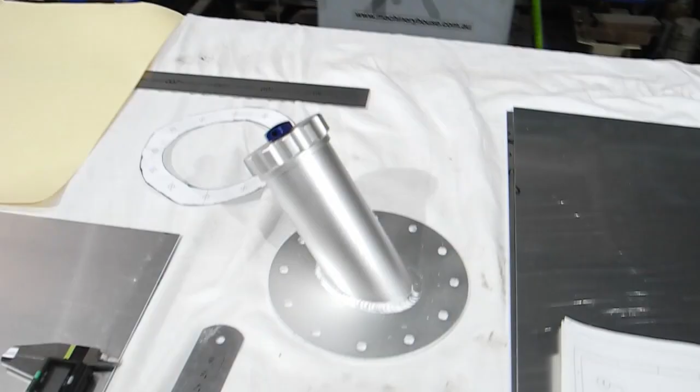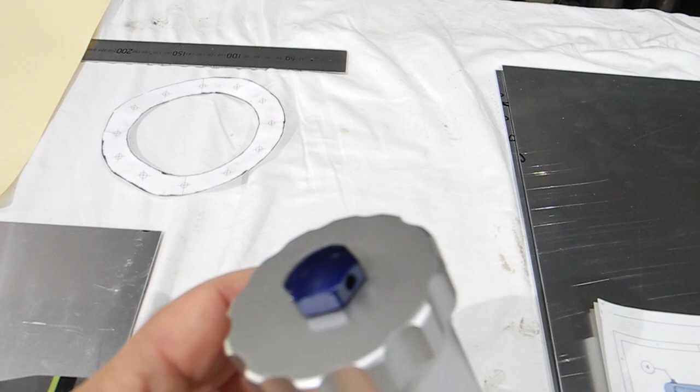Okay, so here we go. Just making some adjustments to the camera, so that we're not reflecting too much light. This is the filler cap that we've bought. That's the little rollover valve to allow the air in. This is actually very much the same as the standard Healeys, except I've gone for a full screw cap and included the rollover valve into the top. And this will also allow me to get access to the tank should I need it at any time.

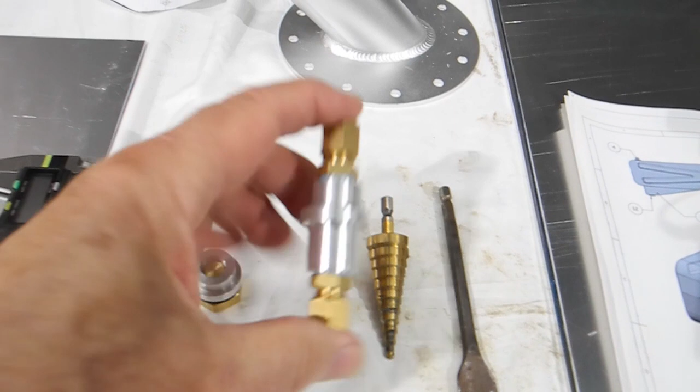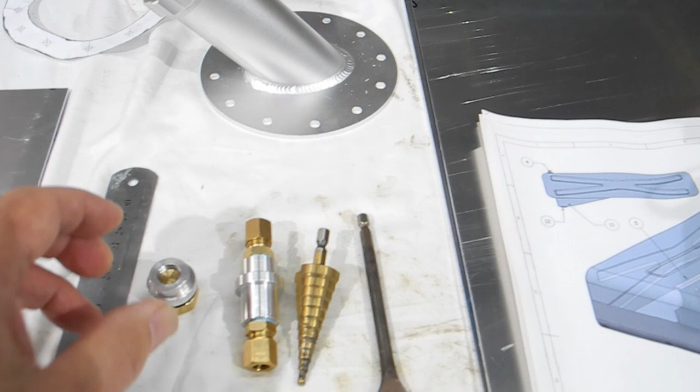Here I've machined a couple of parts already, that's the inlet outlet to the fuel pump, and then to the bottom of the tank, with copper tube there. And this is my drain valve, and I've already made a cap for that as well in brass. Okay, so coming to the drawing, this is my complete assembly drawing. I hope that focuses alright. That's probably a bit better.

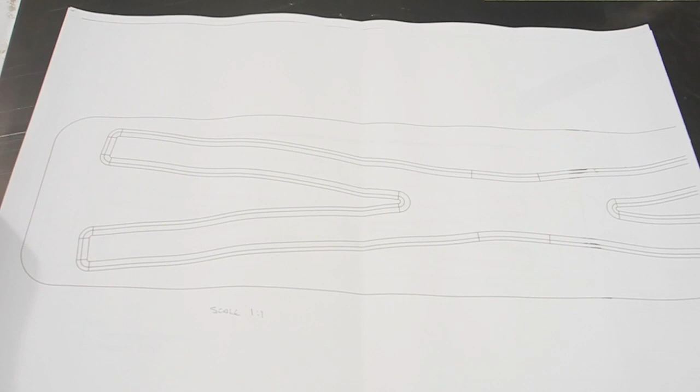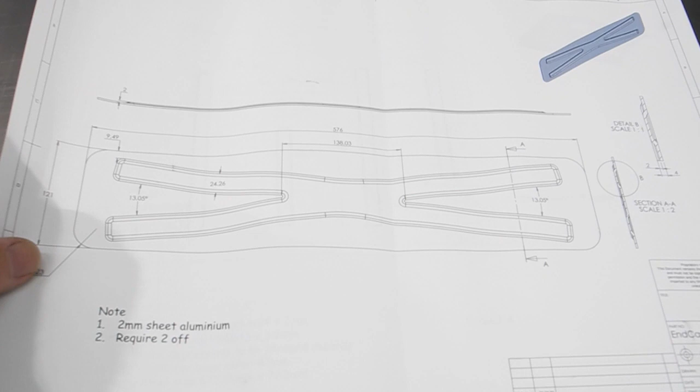Okay, so there's my fuel tank, pretty much almost exactly the same size as the original. This here again is to give me 1-to-1 on the end panels, so that I can just trace that directly onto the end panels for bead rolling. This is again the end panels of the fuel tank. Right, this is the top of the fuel tank. There's the fuel filler, and this here will be where the sender is, and this is this valve here.

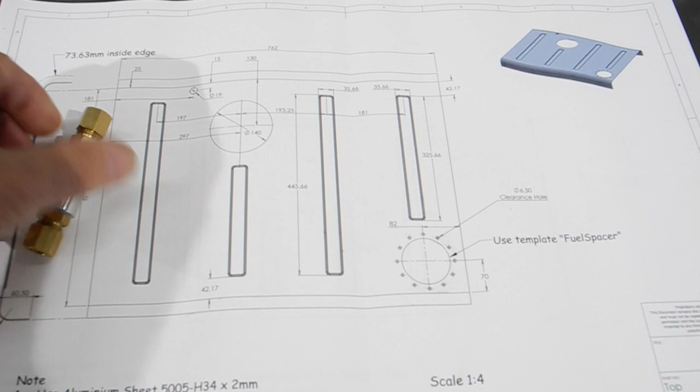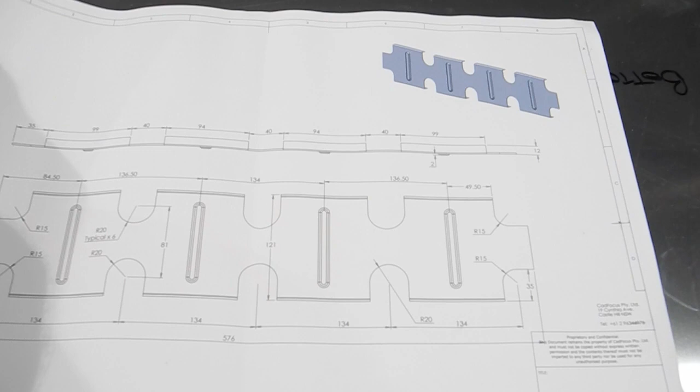The next thing is this is the bottom. Okay, so the sump. And again bead rolling, mainly for the bead rolling sizes. The baffles will look somewhat like this. And that's it for the A3 size drawings. And there's my fuel sump. This part here I've actually already made, and I've got the connections in brass already for that. This here is my drain plug.

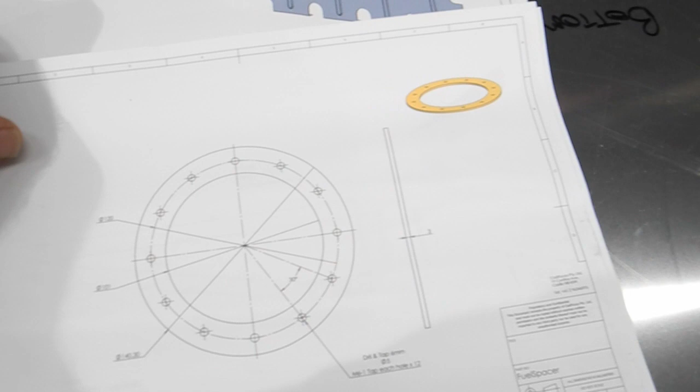Okay, this is the sender. That's a 1-for-1 ratio. I'm doing that in aluminium to weld to the top of the fuel tank, and also another one in brass for the screws to take hold of. Again, 1-to-1 scale ratio. This is the fuel filler. Again, the same thing. I've got to make one out of brass. The brass is coming. 3mm brass to hold all these screws while I lift it up through the tank and through the filler, so I can do up all the nuts.

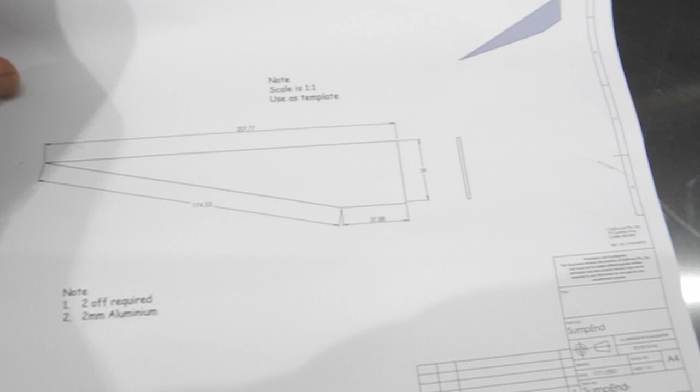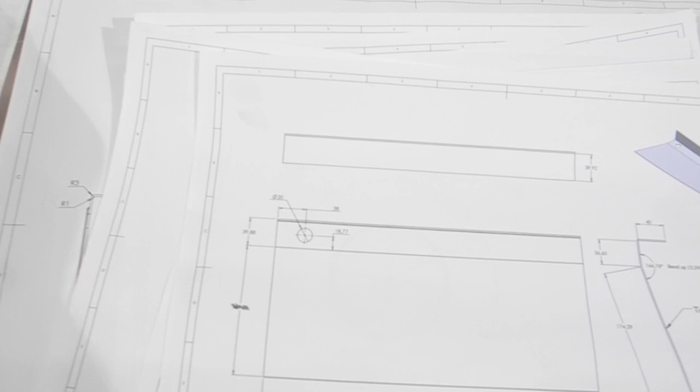This is the end of the sump. Again, just 2 drawings of that, and this is where the sender is, and that sits down into the fuel tank itself. So just a profile of that. So what needs doing is that I actually need to cut all these out, and I've already started with this. I've got the bottom and the top. This is my fuel sump here, and they're my bend marks for it, and that's where the hole is for the fuel drain. So it's just a matter of progressing on and cutting out, which is actually quite boring, I suppose, but the point is that it helps.

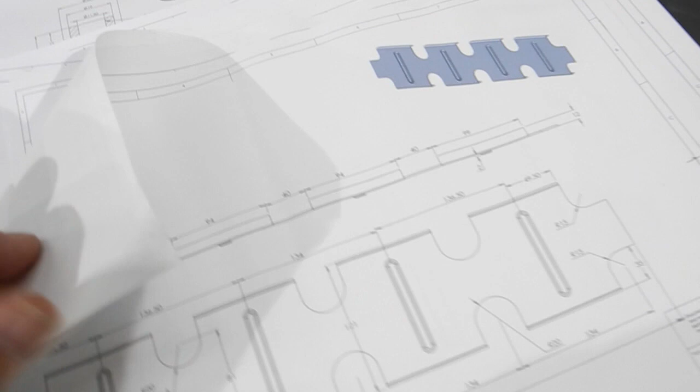The reason I CADed the whole thing up is because it shows me the exact measurements that I will need. Otherwise, you know, to stay precisely to the schematic of the whole drawing. Where is it? Alright, this is the assembly drawing. So the idea is to remain right on spec on that, in the sizing that I've got.

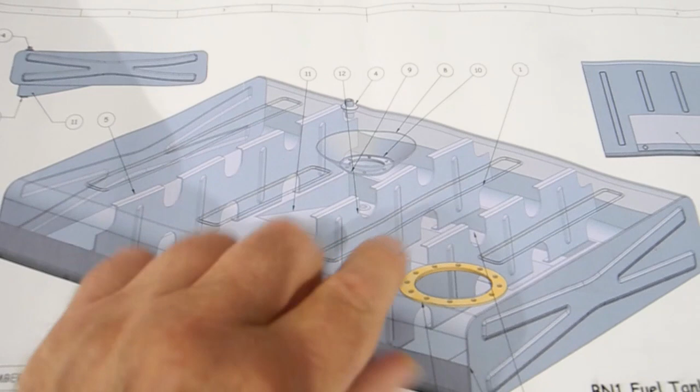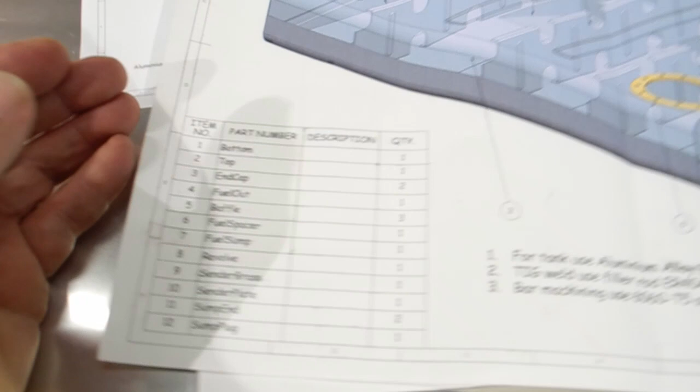Alright. So side view, top view, which you can see through, that's the brass plate, and there's another brass plate here, and then that's the bottom view there. Again, all the strengthener ribs, which I've got to mark out next, once I've cut out all the basic shape from that sheet there. According to this, about 12 parts actually make it, but there's 3 baffles and so on. So this is all my parts, item number. This is the type of aluminium I'm using, which is 5005. The hardness is 34 in 2mm.

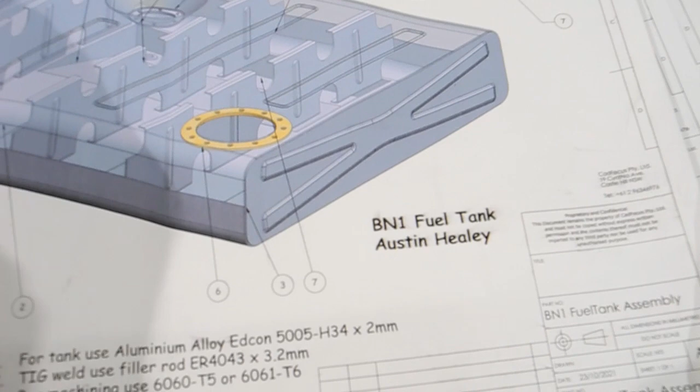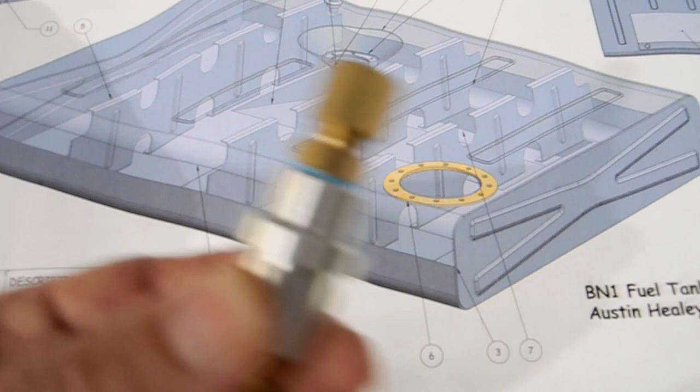I'm using welding rod ER4043 because it's a good flow rod, and the bar, the machining that's already done, I did with 6060 T5 hardness, and that came out well, I was actually quite pleased with that, as you can see. That's pretty straightforward. So I just sit that in and then weld around this. That's why I've got quite a thick shoulder, so that I can zip weld around it. And same with the drain plug as well.

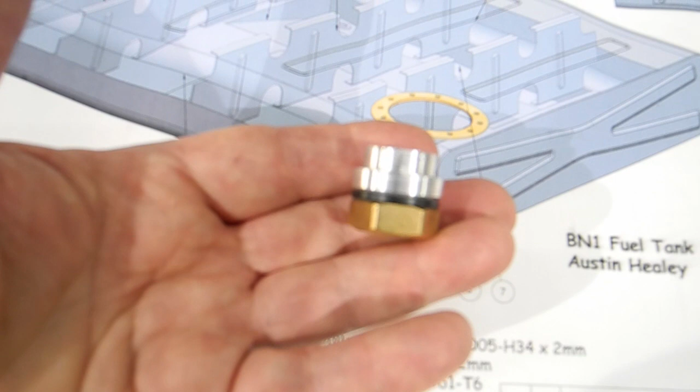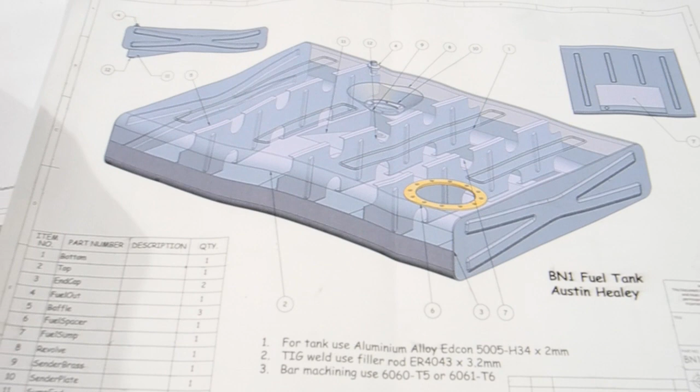Okay, so I'll put you back on the stand, and the rest is just a matter of watching the progress. I'll just show you as I cut out 1 or 2. The more interesting part will be with the bead rolling once I've marked all that out. So let's see how we go. I'll stop there for a moment.

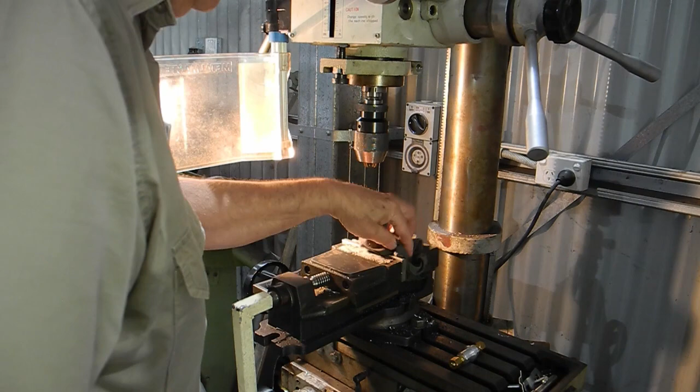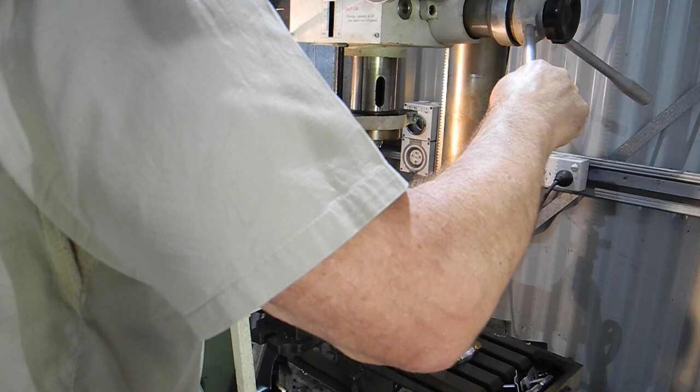Well, hi. Yeah, I felt that I should narrate this part of it because factory noise is just far too much at this stage. This is the sump, and what I'm doing is just drilling the hole for the sump plug. So I've got a conical drill in there, just to make a simple, I think it was about a 20mm hole.

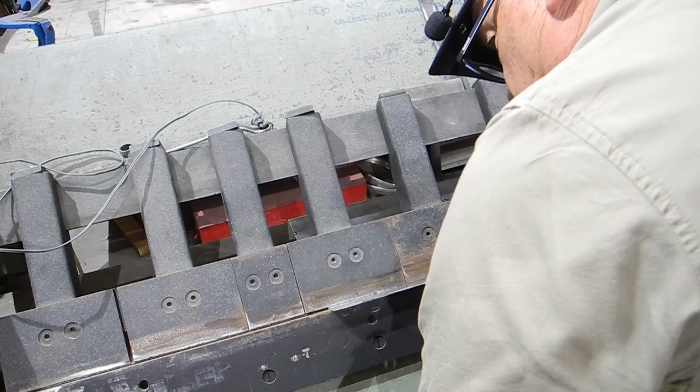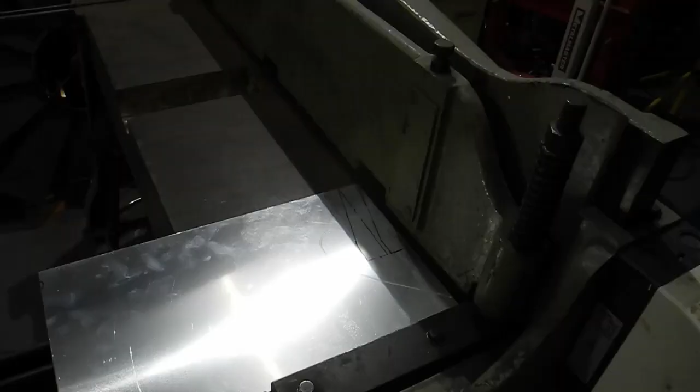Okay, just checking for fit, nice firm fit, and yep, happy with that. Over to the bending machine now, and this is again with the sump, and what I'm doing is using the pan brake bender to bend. These are the ends here that I've got for the sump again, and just guillotining those out.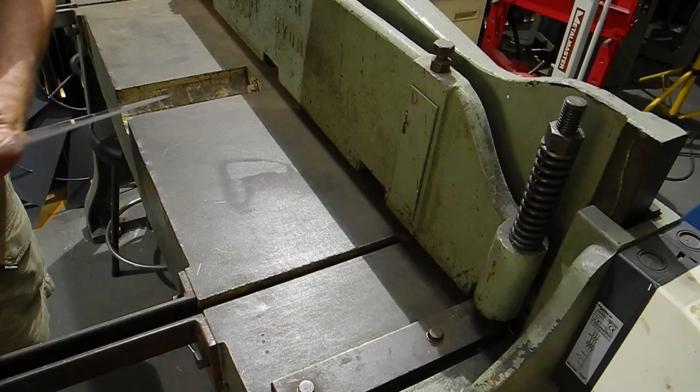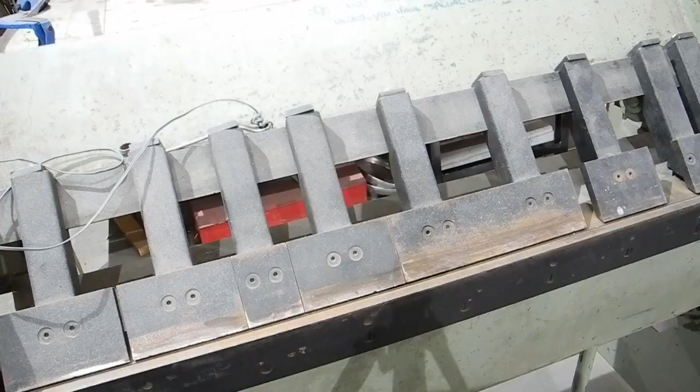I've sped up the whole process from here so that I don't bore you to death. Anyway, so picking up the pieces, pretty old machinery that we've got there in some of the cases, but it all works well, and it's really very well maintained by the guys.

Again, back to the pan brake to do that second bend on the sump, and as you can see there, I'm using the end pieces to give me the alignment and the angle, which is a fairly shallow angle. If memory serves me, it's only about 13 degrees up. And as you can see, I've overbent a little bit and just hammered it back down a bit. Okay, I think I'm happy with that.

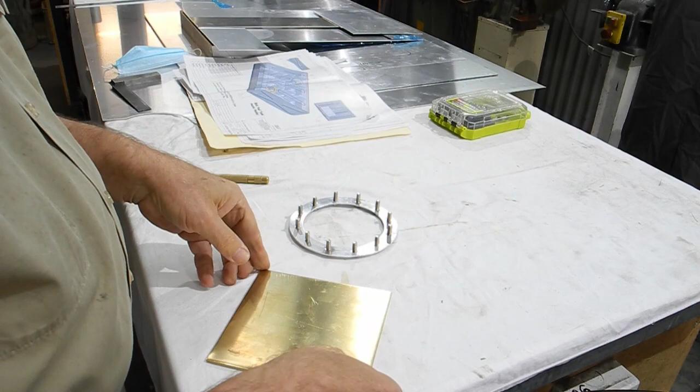Now here I've got brass plate now for these rings. As you can see, 2 rings I'm doing. It's damned expensive, that brass, 3mm brass, and it cost me about $80, and I'm making 2 rings out of that. You can see they're one inside the other, just to keep wastage down to an absolute minimum.

Here I've got a spring-loaded punch, just going around and punching the hole locations. That's a fairly strong spring on that punch, and just using the end of the drill more as a center drill, just to give me a good start so I don't run off with the drill.

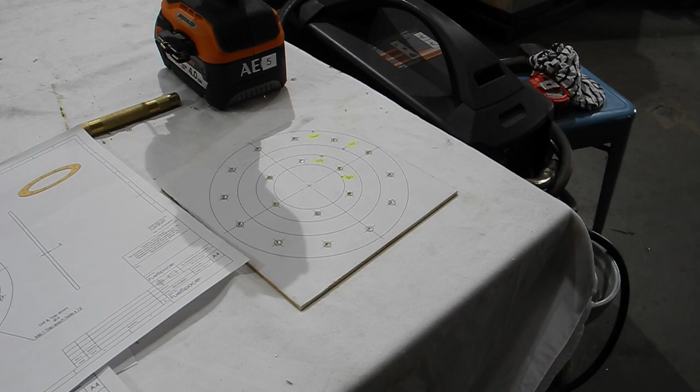Now I had made the larger ring in aluminium, but when I put the set screws through, I found that the threads were stripping, and of course I need to bring those up in one batch from the tank, because at this stage it'll be almost closed, and I need to bring all the screws up in one go. Right, and then the larger drill for the appropriate size thread that I'm using.

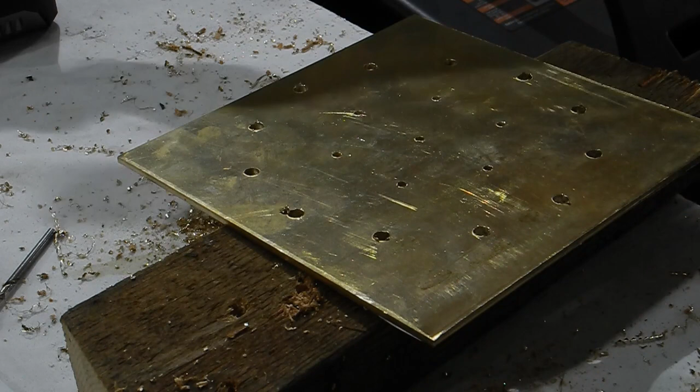My speed on this is about 4 times the normal speed. 5mm drill for 6mm holes, tapped holes, metric. The brass is lovely stuff to work with, no issues with it at all. I think I got this piece on eBay because I just couldn't find anybody locally that would cut me a piece that small. So luckily eBay, and it came from China, had almost the right size that I wanted.

Right, I've got a tapping plug on that, and I'm doing M6, and of course being brass, it doesn't really need any lubrication. All I've got to do is try and remember to stay vertical on the 2 planes. Okay, so that's the outside ones done for the outside ring, and I think these were M4. Okay, all good and done. Just test some of those holes, make sure that I'm happy that it goes where it needs to go. The screws fit. Yep, all good.

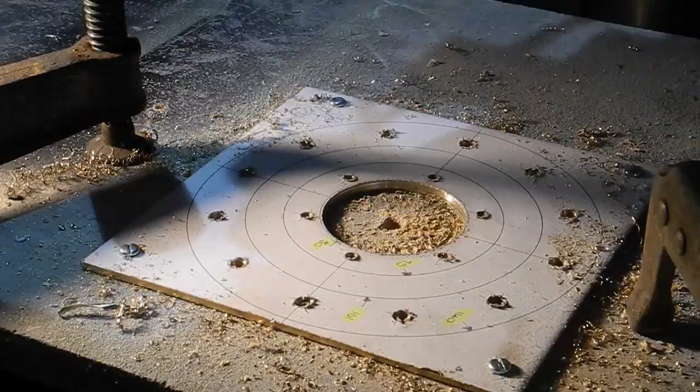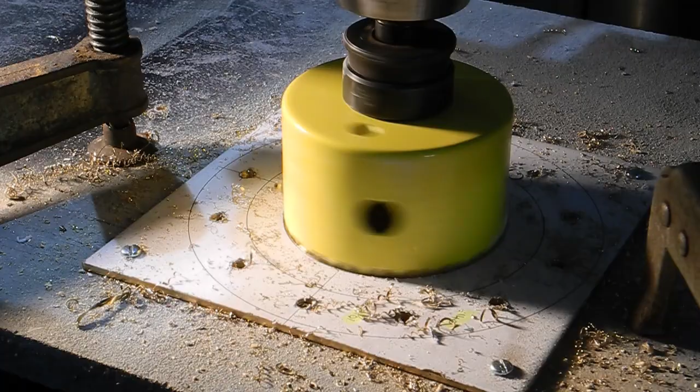Alright, I'd already done the first hole in the hole saw, as you can see. If you notice, I've screwed down the 4 corners of the plate to a piece of timber, and here I am on my second hole saw. I looked at different ways of cutting it. I looked at cutting it on a lathe. I looked at plasma. Plasma's too dirty. I wanted a nice clean finish, and settled on hole saws. And so I'm quite pleased with that. That was a good decision.

Using plasma, I would have had to jig it, and with smaller holes it has a habit of tripping and going off location. As it was, I got these hole saws pretty much the right size. The red ones are the only ones I needed extra. The rest I've got as my own set, and then I found that the shed had some as well. But the red ones are quite cheap actually. They're about $20 each.

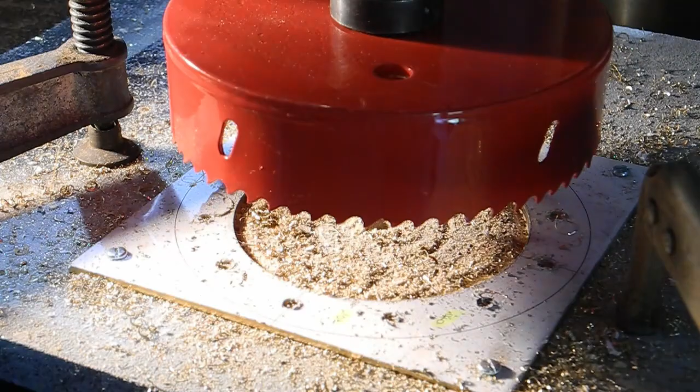Right, and here we go into the last hole. It's 140 mil diameter, and then I started getting problems with the drill. If you notice, that drill head is just dropping off, and the Morse taper is just separating, which right in the middle of a job is terribly frustrating. And no matter what I did, I couldn't get the Morse taper to sit. So I'd get going a bit, like you can see here, and then end up with problems right towards the end of this cut, where it really just started playing up.

I've tried to cut out most of the messy cutting, and had to decide in the end to take that chuck, the Morse taper, take it home and rework it. I took it home for a week, pulled it apart, cleaned it up, and I'll use some bearing Loctite to lock that in. So I actually go back tomorrow, so the first thing I'll do is put that head back in.

So this is just finished the job, a little bit on the frustrated side, but in the end I got there, and the rest of the shed has been without a drill press for the rest of the week. Not that there's much activity. Right, and then finally we get through.

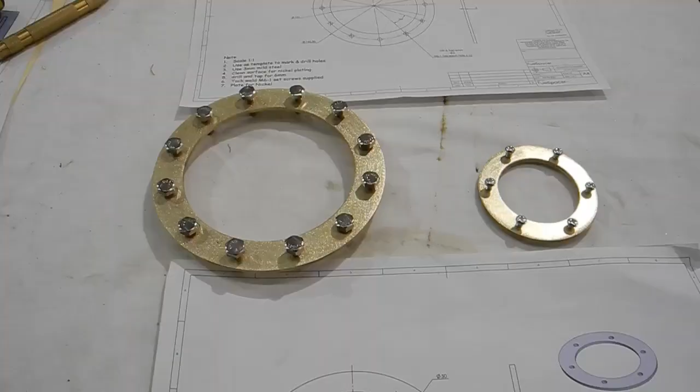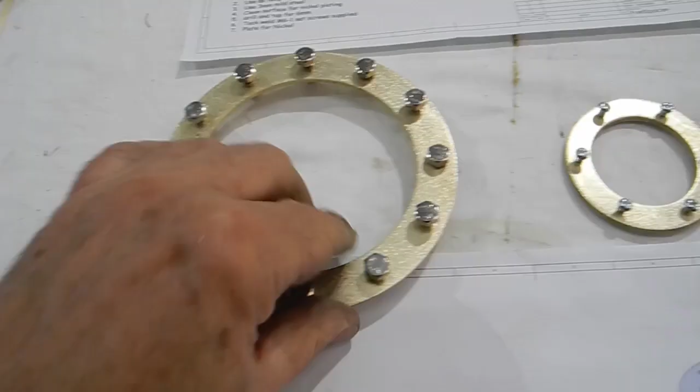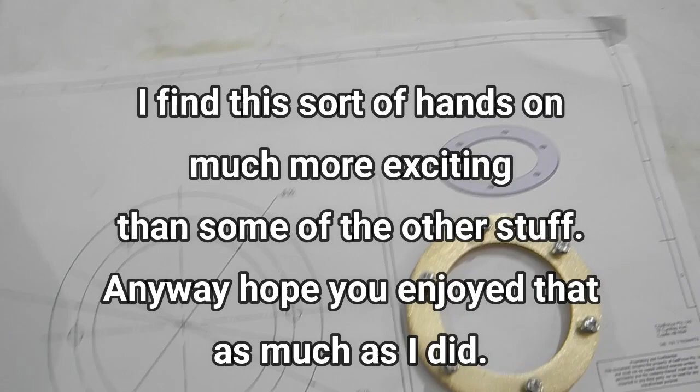Now, so there's my end result, all the screws. They're stainless screws, of course, and they come up through the tank and then through the filler, and help me to hold all the screws in one go as I pull them through, and then put nuts on the outside. That's for the sender, so I've yet to order a new sender, but anyway, I'm very pleased with that. It came out well, it's all accurate, and it's spot on, and that's it.